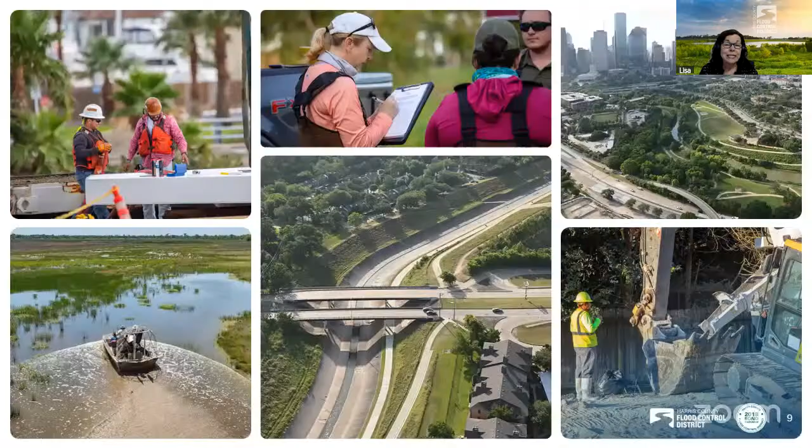We were established by the Texas legislature in 1937 after devastating back-to-back floods hit the Houston area. Today, we are governed by the Harris County Commissioners Court. And for nearly 90 years, we've invested billions of dollars in flood risk reduction projects throughout Harris County. We're creating real change, improving quality of life, and building a more resilient future.

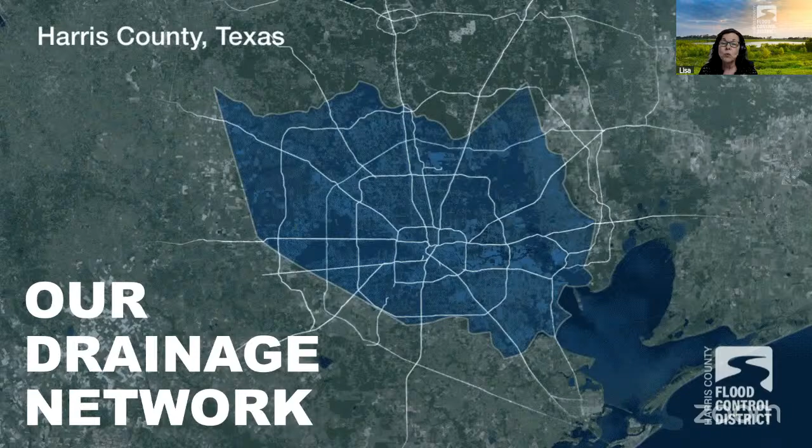And how do we get all of this important flood risk reduction work done? We do it through a variety of funding sources, including the Flood Control District's dedicated property tax, the 2018 bond program, and a wide range of federal, state, and local partnerships. Our drainage infrastructure is extensive. Not only do we manage hundreds of stormwater detention basins, but we also maintain more miles of channels than some states have in highways.

In fact, our network includes 2,500 miles of channels, which is the distance from the state of New York to the state of California. This expansive channel system moves stormwater out to Galveston Bay, and during heavy rain events, these channels may start to reach capacity. That is when the stormwater detention basins we've built throughout the county step in and temporarily hold that stormwater, which helps reduce the risk of flooding.

Most people are aware that Harris County is prone to flooding. Not only do we have extreme rainfall events like tropical storms and hurricanes, but our land is also flat, and that means stormwater often moves slowly when making its way to bayous and channels. And making things even trickier are the soils across the county, which are mostly clay and don't absorb stormwater very well. So what happens, stormwater collects on the ground, creating a pooling effect, which increases the risk of flooding.

An interesting fact, and certainly something important to note, is that some streets in Harris County are intended to temporarily hold stormwater before conveying it to our channels and bayous. That's why it's critical to adhere to safety warnings and stay off the roads during heavy rain events.

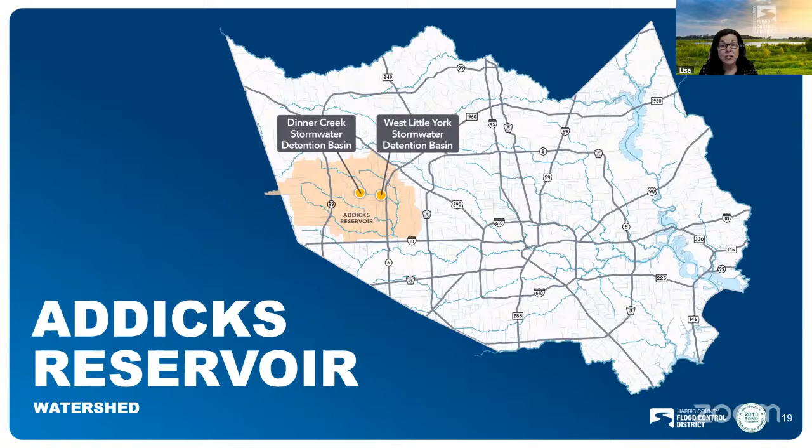The projects we're talking about tonight are located in the Addicks Reservoir watershed in western Harris County. Rainfall within the 138 square miles of the Addicks Reservoir watershed drains to the watershed's primary waterway, Langham Creek. Dinner Creek is also a tributary of Langham Creek. Stormwater runoff from this watershed drains through the Addicks Reservoir and eventually into Buffalo Bayou.

Built in the 1940s along with Barker Reservoir, Addicks Reservoir is part of a federal project designed to reduce flooding risks along Buffalo Bayou, which flows west to east through downtown Houston. The U.S. Army Corps of Engineers owns, operates, and maintains the reservoirs. Here we're showing the location of Addicks Reservoir, Langham Creek, and the tributaries that flow into the Addicks Reservoir.

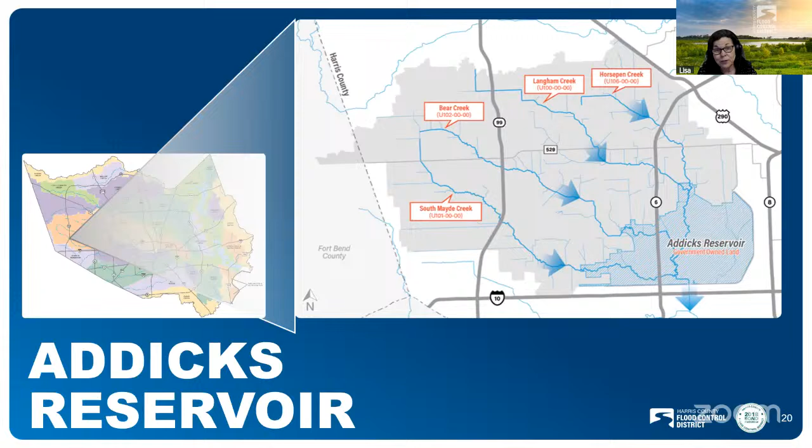Now that we've shared key background information, we'll get into the important details about the projects. As we go through the project details, feel free to drop questions or comments into the Q&A feature. With that, I'll hand it over to Jonathan St. Romain, who's with the Partnerships and Program Division with the Flood Control District. He'll share more about the Dinner Creek Stormwater Detention Basin and the West Little York Stormwater Detention Basin. Jonathan, over to you. Thank you, Lisa.

Both of the projects we are talking about tonight, the Dinner Creek and West Little York Stormwater Detention Basins, are located in West Harris County, south of FM 529 between Greenhouse Road and Highway 6. This area has a history of flooding during heavy rain events, particularly for the subdivisions located downstream of the Dinner Creek Stormwater Detention Basin. Both of these projects aim to reduce flood risk in the area by increasing stormwater storage capacity along Dinner Creek and Langham Creek.

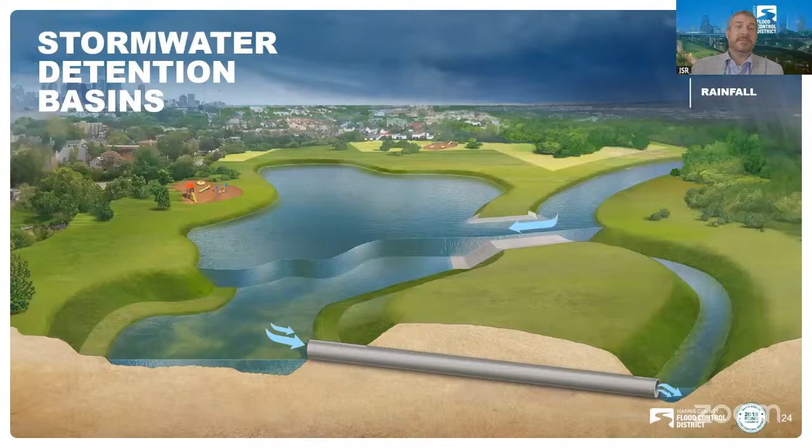Let's take a minute to further explain how stormwater detention basins work to help with flood risk reduction. When there's heavy rainfall, water levels in our channels start to rise. When a channel reaches its carrying capacity, stormwater can overflow into the detention basin through a structure typically known as a weir. Weirs are built across a channel specifically to help direct the flow of stormwater.

While channel conveyance improvements help move stormwater more efficiently out of an area, stormwater detention basins hold stormwater, but only temporarily. We strategically construct stormwater detention basins where they will intercept excess stormwater to help keep it from overwhelming channels. Once water levels in the channel go back down, the stormwater stored in the detention basin flows by gravity through pipes back out into the channel and eventually out to Galveston Bay.

The Flood Control District is a no adverse impact agency, which means we do not allow our projects to reduce flooding risk for one area while increasing risk somewhere else. We construct a stormwater detention basin to store excess stormwater. Then, once the channel starts to recede, the stormwater makes its way out of the detention basin and back out into the channel.

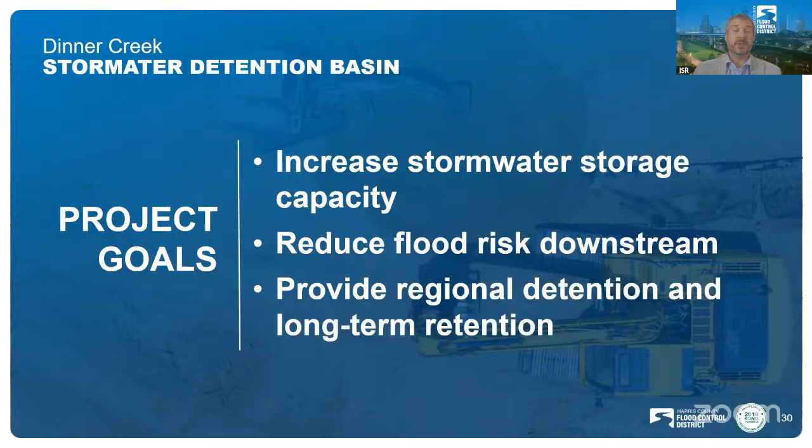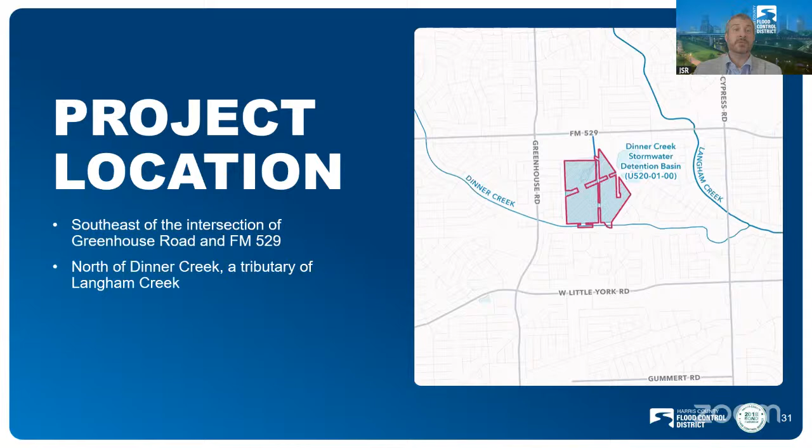This project is located southeast of the Greenhouse Road and FM 529 intersection along Dinner Creek, which is a tributary of Langham Creek. A small portion of this project site was originally excavated by a subdivision developer to be a 3-compartment dry bottom stormwater detention basin.

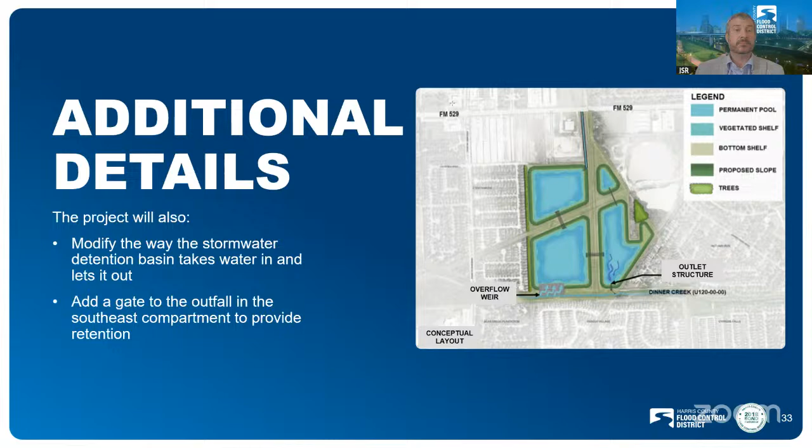Detention means temporarily holding stormwater and slowly releasing it to reduce flood risk downstream. Retention means keeping stormwater in place for a long period. With this project's design, the new gated outlet will let the basin retain water in addition to detaining it. This is particularly important because this project is upstream of Addicks Reservoir. Retaining additional stormwater within the basin can reduce the amount of stormwater that fills Addicks Reservoir during a rain event. Now, let's walk through a hypothetical rain event to better visualize detention versus retention.

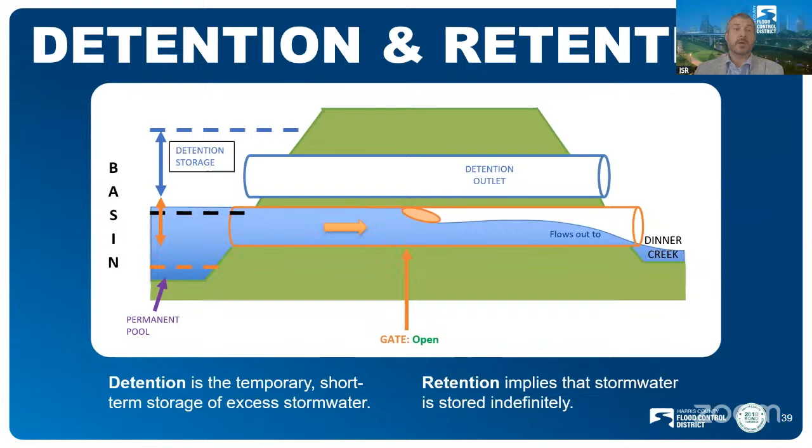When we calculate the stormwater storage capacity of a detention basin, we use a unit of measurement called an acre-foot. 1 acre-foot equals about 325,851 gallons of water. The Dinner Creek Basin is expected to provide about 854 acre-feet of stormwater storage capacity, and that's roughly 278 million gallons. To put that into perspective, that's equal to approximately 854 football fields covered in 1 foot of water.

Atlas 14 is the current official nationwide rainfall study used to provide engineers with rainfall estimates in order to model a variety of rainfall events, from everyday rainstorms to rare extreme events. Before Atlas 14 was adopted, the former 100-year design storm models for this project showed a water surface elevation reduction by nearly 1 foot near the project limits.

When we say water surface elevations reduced, we mean that a particular rain event will cause Dinner Creek to rise to a specific level today before this project occurs. But once the project is complete, that same specific storm event would produce a water level in Dinner Creek that's lower than before. So for this project, it will be nearly 1 foot lower.

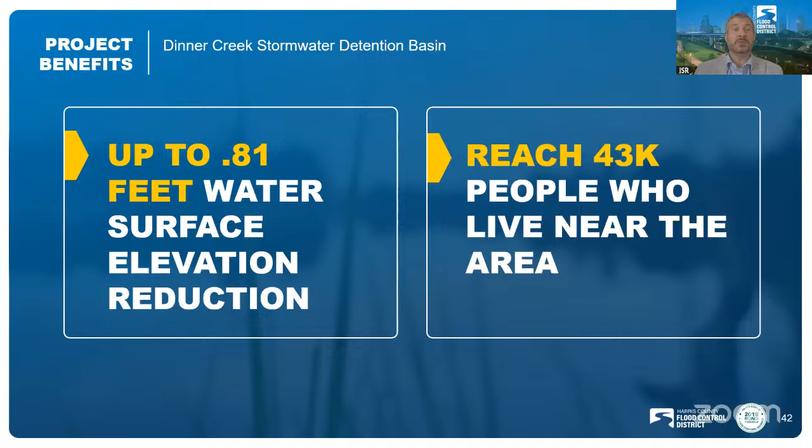Earlier in this presentation, Lisa referenced funding sources. So let's take a closer look at funding for this project. The estimated total cost to see the Dinner Creek Stormwater Detention Basin through to completion as of today is about $51.2 million. This project is being funded by 2 sources, including the 2018 bond program and a community development block grant.

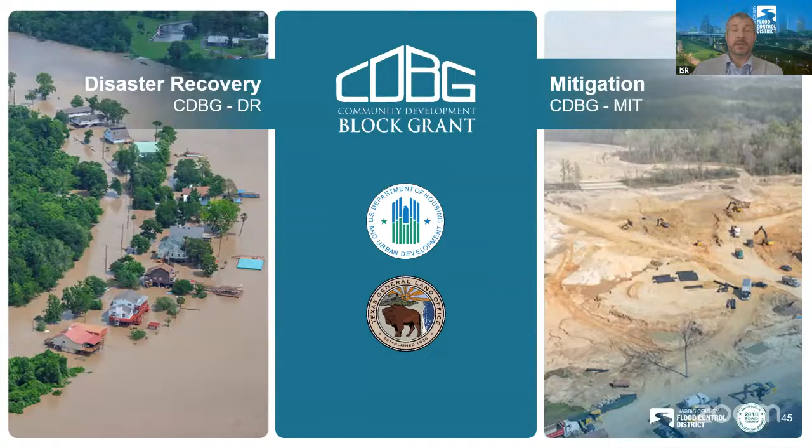We partnered with the U.S. Department of Housing and Urban Development, also known as HUD, to receive funding from its Community Development Block Grant Disaster Recovery Program. Disaster recovery funding focuses on projects helping communities with long-term recovery after a federally declared disaster, which in this case is Hurricane Harvey. The Texas General Land Office, or GLO, administers the grant program at the state level for HUD. This means the GLO distributes funds to local, county, and state agencies approved to receive funding for projects benefiting areas directly impacted by Harvey.

The Flood Control District has been awarded approximately $322 million for projects meeting the program's requirements. The Dinner Creek Stormwater Detention Basin project could receive up to $48.9 million in CDBG disaster recovery funding. This project's service area benefits households where at least 51% of the population meets the federal classification of low to moderate income.

Now that we've talked about the design, benefits, and funding for this project, let's talk about timeline and next steps. This project's design was finalized in the first quarter of this year. After the design stage comes the construction stage. Construction is anticipated to begin in the third quarter of 2026 and estimated to be completed by the fourth quarter of 2028. As we move into the construction stage, we will share updates with the community.

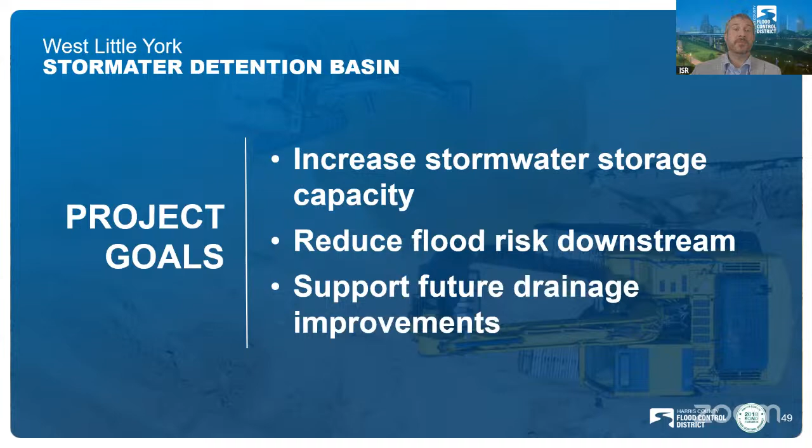Now that we've provided information on the Dinner Creek Stormwater Detention Basin, we'd like to share details on the West Little York Stormwater Detention Basin that is also part of our efforts to reduce the risk of flooding in the Addicks Reservoir watershed. So what's expected of this project once completed? First, it increases stormwater storage capacity. It also reduces flood risk for areas downstream. And finally, it helps support future drainage improvements.

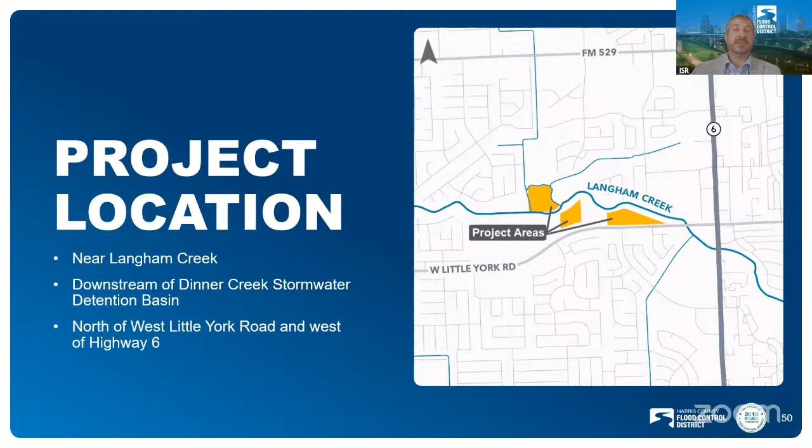The West Little York Stormwater Detention Basin is located downstream of the Dinner Creek Stormwater Detention Basin near Langham Creek, north of West Little York Road and west of Highway 6. This project was originally recommended through the Lower Langham Creek Regional Detention Study. The site was partially excavated between 2020 and 2024. After that, the project was paused while additional funding was secured. Now, with new funding expected from a state legislative appropriation administered by the Texas Water Development Board, the design has been updated and the project is moving forward to construction.

The recommended design for the West Little York Stormwater Detention Basin includes 3 dry bottom compartments. Compartment 1 is located just north of Langham Creek, and compartments 2 and 3 are south of Langham Creek. The West Little York Stormwater Detention Basin will provide approximately 100 acre-feet of stormwater storage capacity. That's adding more than 32 million gallons of storage capacity to help reduce the risk of flooding in the area. Before Atlas 14 was adopted, the 100-year design storm models for this project showed a water surface elevation reduction along Langham Creek by nearly 2 inches near the project limits.

This project is funded in part through the 2018 bond program and up to $6.5 million in state funding administered by the Texas Water Development Board. Additional partnership funds from the Environmental Protection Agency are expected to be secured for an additional phase of this project that will provide water quality enhancements. The estimated cost to complete the design stage and the construction stage is approximately $9.2 million. Of course, this is just an estimate at this time for both the design and construction stages.

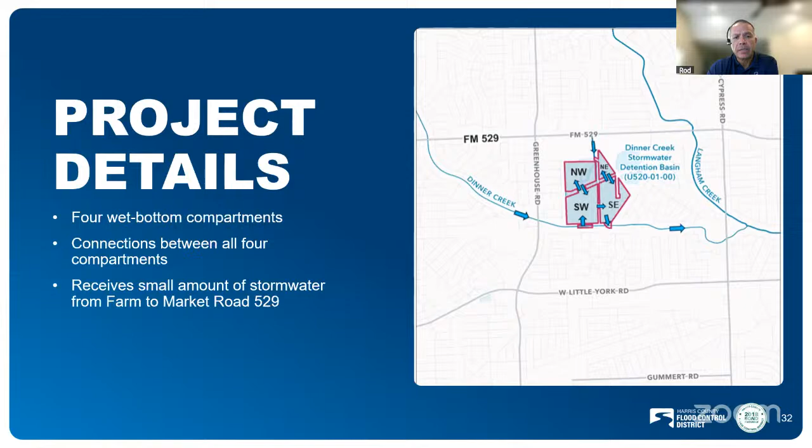All right, thank you, Rod. Our next question is for Jeff. Jeff, it was mentioned during the presentation that construction for the Dinner Creek Stormwater Detention Basin project is anticipated to start in Q3 of 2026. We often receive questions about project timelines and why the construction process can't start sooner. Can you please explain what steps are being taken between now and construction start?

Sure. To go from the design stage to construction, there's a couple of steps in between. Basically, there's a need to go through the public bid advertisement phase in order to advertise the project so that we can receive necessary proposals from the contractors. Another layer to that is this project was being bid through a competitive sealed proposal process. That allows the Harris County Flood Control District to select a contractor not just based on lowest price, which is one component, but including project experience, construction scheduling, and overall team experience of the contractor.

So it allows the committee to rank these and select the most highly qualified contractor. That took a little bit of time, but ultimately that's what segues into the selection. And then from there, you have to go through the necessary contract paperwork and permit approval once the contractor's on board. So there's a little bit of time in order to go from design to construction, but we're coming near to that finish line.

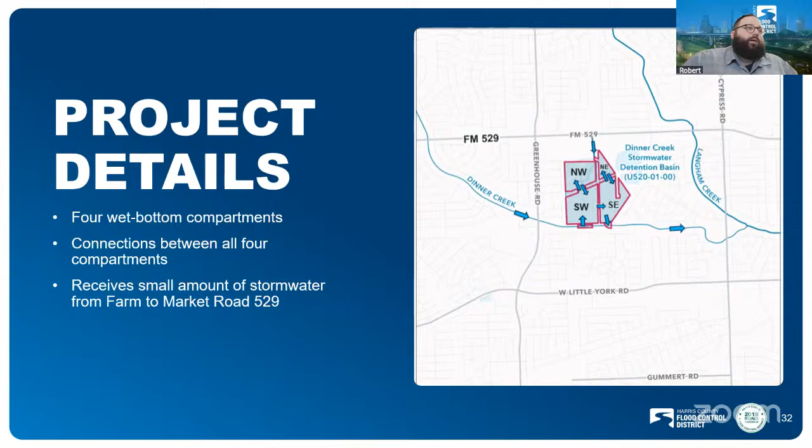We have another question from Adam. Adam is asking, and Hanny, this question is for you. We often receive questions about impacts to traffic and road and trail closures. Will there be traffic and other impacts during the construction of the West Little York Stormwater Detention Basin project?

Yeah, that is a very good question. There may be some temporary closure or flagging operation near the construction access point of the site while we are starting the construction. But it's too early to know specifics; as we get closer to the construction, we will provide more updates to the community regarding any closure or flagging operation we may expect during the construction period. We always work to minimize traffic and construction impacts and keep the community informed once we start the construction stage of the project. All right, thanks, Hanny.

Our next question is for Rod. Rod, we reviewed this in the presentation, but can you expand upon the difference between retention and detention? Yes, Robert, of course. As Jonathan described, the Dinner Creek Stormwater Detention Basin project is unique because it includes a gated outlet between the southeast compartment and Dinner Creek, allowing the stormwater detention basin to store stormwater for short or long-term periods, called retention.

So with this project design, the new gated outlet will let the stormwater detention basin retain water in that compartment in addition to detaining it throughout the basin. This is particularly important because this project is upstream of Addicks Reservoir. Retaining additional stormwater within the basin can help reduce the amount of stormwater that Addicks Reservoir holds during that rain event.

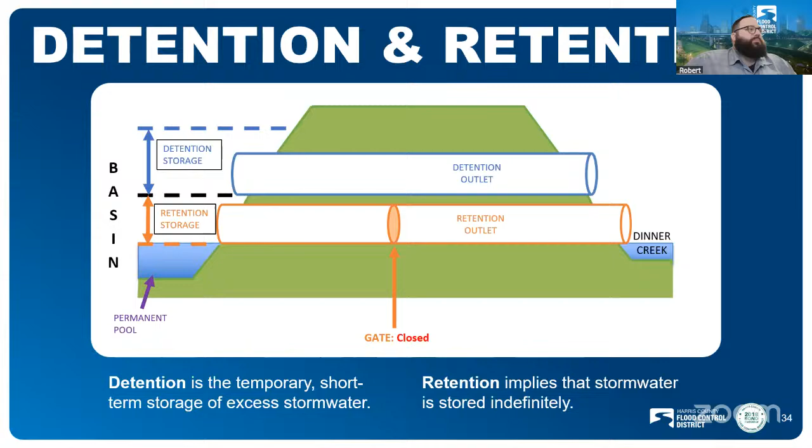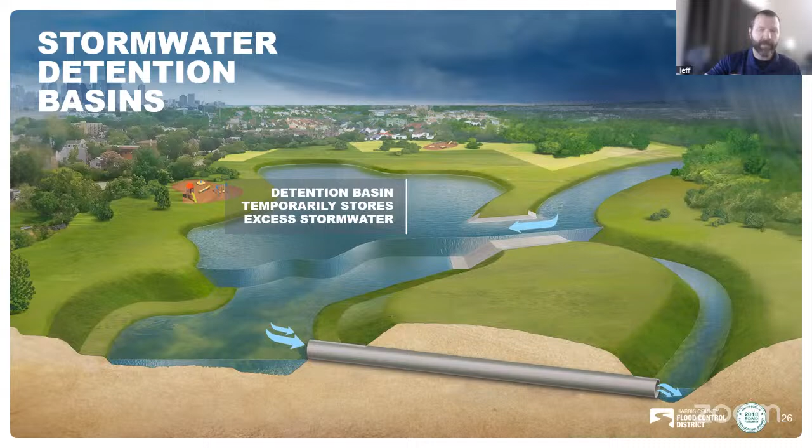Sure, good question. I think a key thing to note is that a wet bottom stormwater detention basin is not full in that aspect. Basically, the added stormwater detention volume is designed and constructed above and on top of the normal pool for flood mitigation purposes. So you have your static normal pool that's basically down at the flow line, and as it rains and the creek and basins fill up, it fills up that volume on top of the normal pool static water. So that's kind of how it functions.

And generally, a wet bottom basin can provide more storage volume and has a greater environmental aesthetic enhancement, as I mentioned earlier, with water quality than a dry bottom stormwater detention basin.

All right, thank you, Jeff. This next question is for Hanny. Hanny, the West Little York Stormwater Detention Basin project plans include 3 dry bottom compartments. Can you please explain in more detail why these compartments are planned to be dry bottom instead of wet bottom?

Yes, of course. The West Little York Stormwater Detention Basin compartments are planned to be dry bottom compartments because the compartments were deemed not viable for a wet bottom basin in the preliminary engineering study that was performed on this area. The site conditions at that location do not allow for enough inflow capabilities for a wet bottom basin. A dry bottom basin drains dry and remains dry in between rain events rather than maintaining a permanent pool of water.

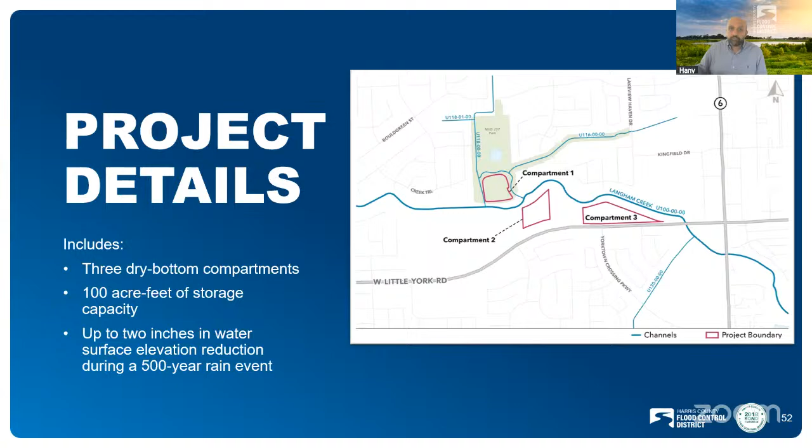All right, thank you, Hanny. Our next question is for Jonathan. Jonathan, can you share the history of the West Little York Stormwater Detention Basin project since the last community engagement meeting?

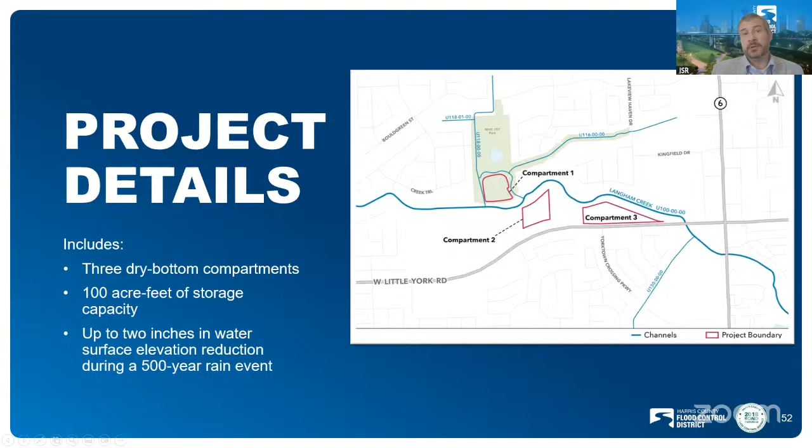Sure. So we can go even a little further back and remind folks that the project was originally recommended in 2006 by the Lower Langham Creek Regional Detention Study. More recently, since the last public engagement meeting, similar to Dinner Creek Detention Basin, we were able to utilize a sand contractor on this site to excavate material at no cost to the district. And so that occurred between 2020 and 2024 to help bridge that gap between the study and where we are today.

We also, again, same as Dinner Creek, worked on securing that funding so that we can bring the project to completion, along with finalizing the design and working through utility conflicts and things like that. And so that brings us to today, where we are really close to moving forward with construction.

All right, thanks, Jonathan. This next question is also for you, Jonathan. The bond program was mentioned earlier in the presentation, but for those unfamiliar, will you please share more about what it is and how residents can learn more about it?

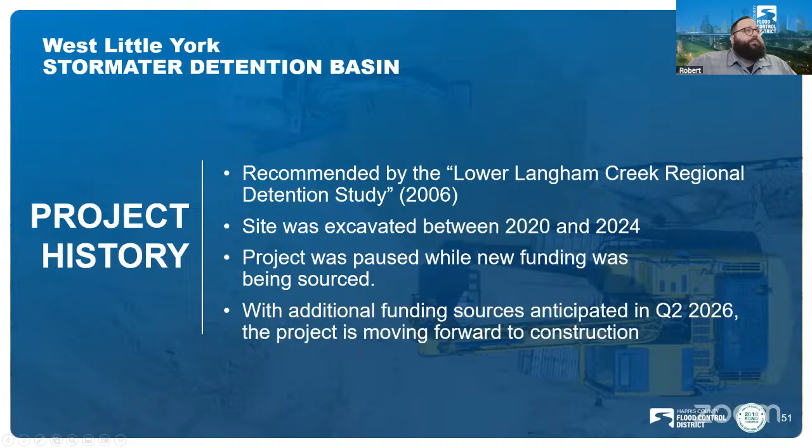Sure. So the Flood Control District has several funding sources for our projects, and you've probably heard about the 2018 bond program. So after Hurricane Harvey devastated the county, voters approved a $2.5 billion bond to help fund infrastructure improvements, many of which are constructing stormwater detention basins across the county, just like these that we're talking about tonight. Many of those projects also include channel conveyance improvements, and a lot of times we use them in conjunction with stormwater detention basins, and those really comprise your typical bond program infrastructure project.

The Flood Control District has also worked with several county departments and other partners locally, across the state and federally, to secure an additional $2.7 billion to total $5.2 billion in bond program spending. And so really a good bit of that $2.5 billion in local bonds was leveraged to help secure that partnership funding.

We do have a dashboard and interactive map on the bond projects on our website, so residents can find pretty useful information on all of our projects, including funding and project status and more. And so we encourage everybody to stay up to date by taking a look at hcfcd.org/2018-bond-program for more.

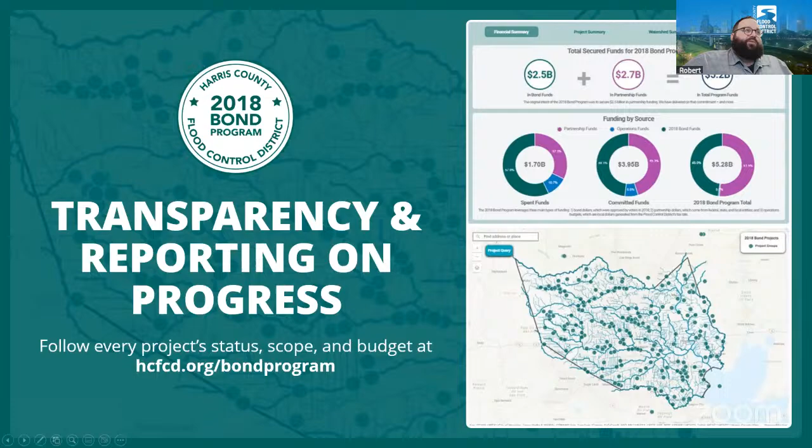All right. Thank you, Jonathan. This next question is for Rod and Hanny. And this is a common question we receive from the community. Our county's waterways are definitely multi-purpose. Do you know at this time if there are going to be any hike and bike trails constructed as part of the Dinner Creek Stormwater Detention Basin or West Little York Stormwater Detention Basin projects?

I guess I will start and I will speak on behalf of Dinner Creek. Thanks for the question. To start answering the question, I would like to reiterate the mission of the Flood Control District, and that mission is to plan, implement, and maintain flood risk reduction projects guided by the community and natural values. There can be long-term community benefits beyond flood risk reduction, as we see in many detention ponds throughout the county. In some cases, stormwater detention basins can include recreational

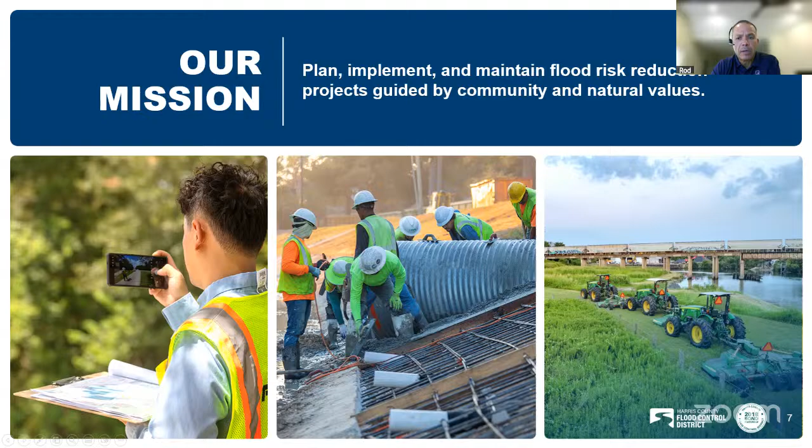features like walking trails or green space. Those amenities are typically developed and maintained through partnerships with local governments or community organizations. Currently, there are no trails in the project area for the Dinner Creek Stormwater Detention Basin project.

Yes, as for the West Little York Stormwater Detention Basin, as we mentioned during the presentation, amenities such as walking trails and green space are usually developed and maintained through partnerships with local governments or community organizations. Currently, there are no trails planned for the West Little York Stormwater Detention Basin projects.

Okay, thank you both. Our next question is for Jonathan. Jonathan, community members often ask how they can stay informed about flooding conditions in their area. What many may not know is there are resources available online. Jonathan, will you please share more about how residents can receive flood warning text and email alerts?

Yeah. So one of the most important tools that we have for informing residents about potential flooding conditions is our flood warning system. The flood warning system shares near real-time data on rainfall and water levels along bayous and major tributaries in and around the county. The information is collected through hundreds of gauge stations that share information back to our flood warning system.

And so everyone can view an interactive map of the gauge stations, including rainfall levels and channel status and inundation maps at harriscountyfws.org. It's a really helpful site. Last Friday when we got all that rain across the county, I was on that site most of the day, tracking how much rain all the gauges were piling up and seeing what was happening in the channels. Fortunately, it was only 2 or 3 inches, and so it wasn't that bad.